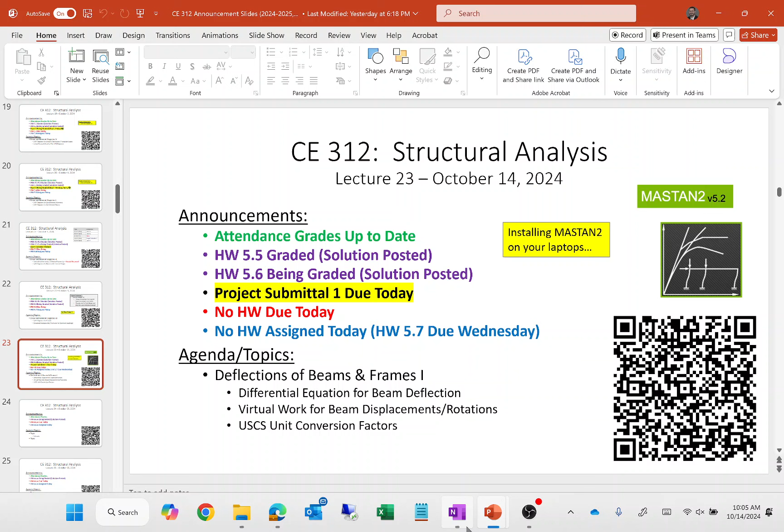He didn't get the code because he walked in a couple minutes late. Listen, he's like, I'm wearing this hat, he won't notice. I'm just messing, I'm just playing.

Okay, so today what we're going to do is talk about deflections. I'm going to tell you today is going to be a little bit like movie time, whereas we're going to be talking through a derivation. I just want you to sit back and absorb what we're going to talk about today. Before I start clicking through the slides, I want to go through a couple of summary bullet points here on the board. Nothing here on the board is going to be in the slides, I just want to use this for discussion purposes.

Let's strike a line in the middle of the board to separate our discussion. Okay, so the first thing I want to talk about is axial deformation. This is basically what we dealt with for trusses, when we did a truss analysis.

Now, if you recall, if I wanted to find the deflection at some point in a truss, at some joint, we would be using the principle of virtual work, right? Let's make sure we're all on the same page. The method of virtual work says that we perform two analyses. We perform a real analysis, so we analyze the structure subjected to the loads as they are present on the original problem. Then we conduct a virtual analysis. Remember how the virtual analysis works? You kick all the original loads off the structure, and then you put a single unit load at the point that you're interested in finding the displacement in the displacement's assumed direction. If you get a positive answer, that means the assumption's correct. If you get a negative answer, the assumption's incorrect. Everybody with me on that?

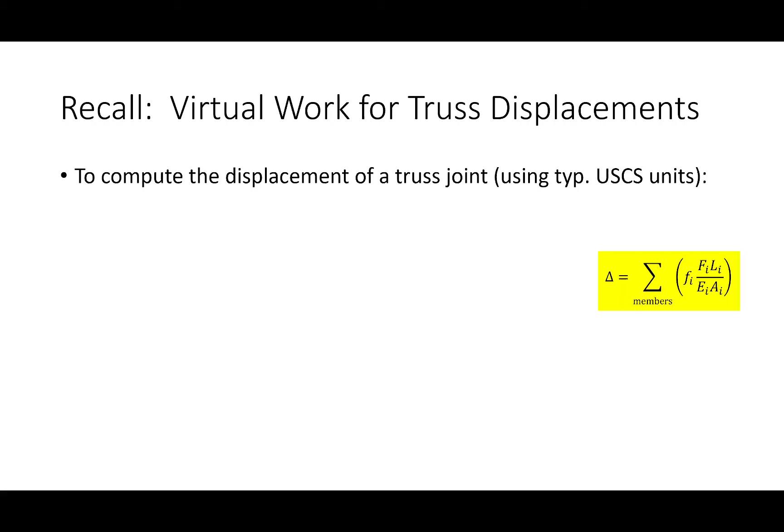Let's take into account what each of these terms are. The big F is the real forces from the real analysis, and little f is the virtual forces from the virtual analysis. Big F is measured in kips, little f is unitless - it doesn't have any units. Now what about the member length? It needs to be expressed in inches, because this is in KSI, square inches. But if I gave you a truss, did I tell you the members were 140 inches long, or did I tell you they were 10 feet, 25 feet, 30 feet? What did you then do to those lengths? You converted them to inches by multiplying by 12.

So I propose we have a conversion factor here of 12 - that if we had left everything in feet, our answer would not have made sense unless we multiplied the answer at the end by 12, because the member lengths would have had to be in inches. Does that make sense? If that's the case, I propose we'll have similar conversion factors for beams and frames, but they'll be a little different. We're going to have a conversion factor for deflections and a conversion factor for rotations. We'll get to this near the end of our lecture today, but I just wanted to have everything here on the board.

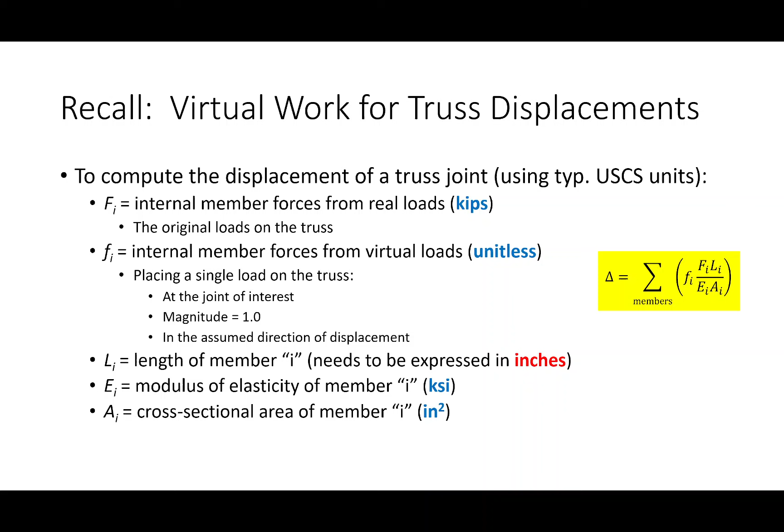Now let's go back to our energy discussion that we had brought up when we first started evaluating trusses. We said, okay, we're going to treat truss problems like an energy problem. Energy going into the system has to equal energy going out. In other words, the stored energy, the energy that the system has to store under applied loads has to equal the deformations that you get under those loads.

Sort of like Link with the bow in Zelda, right? Link applies an external force, the bow deforms. The further that Link draws the bow, the more energy goes into the arrow. Same idea here. When you apply loads to a system, it deforms. The more load you apply, the more deformations that you get. And so it's a linear relationship if you assume linear elastic behavior, which for most routine structural analyses we do.

We also did some math tricks, two math tricks. The first math trick is we said the problem with a direct energy comparison is that if you want to find deflections at some point, you don't have a load there. So we'll put a fake load at that point. We'll call it a virtual load. We call that P1 in our analysis. So we'll preload the structure with this fake load, then put the real loads on it. So that was our first math trick.

And our second math trick was if all the energies have to equal, then each of the components have to equal one another, and we'll just deal with the easiest one. We'll deal with W2 and U2. Set those two terms equal to one another and recognize that P1 is the fake load that we made up. We'll call that load 1.0 or 1. And by golly gosh gee, we get our deflection equals little f big F L over EA, which was what we were after the whole time.

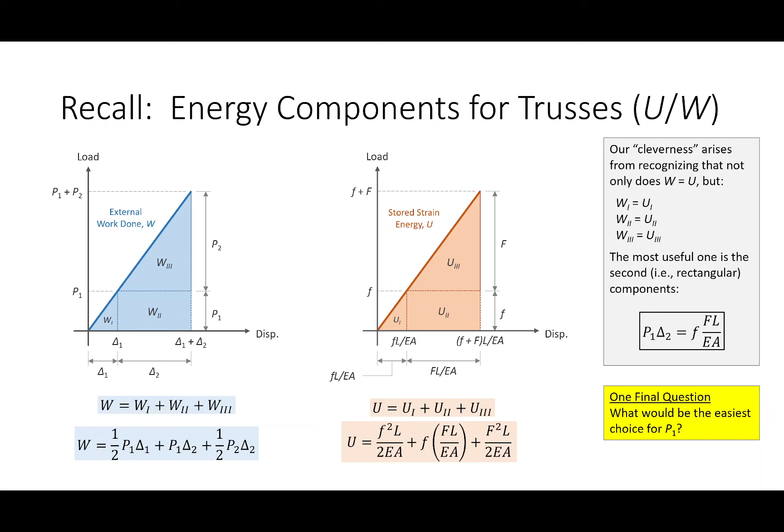Now, just a side note here, and this is what I was talking about with this point right here, is that when we're computing displacements, what we're doing is we're summing up the energy in each member. We're summing up that U2 term in every member. That is the displacements, essentially. So summing up the displacements is the summing of that stored strain energy. That definition, this closed formula right here.

This only works if everything is constant inside that sum. I mean the little f, the big F, the E, the A, all those four terms. The E and the A, that makes sense, that for the most part is going to be constant in most practical applications. But if the loads are variable, then that isn't going to be the case. So what's going to happen if the loads are variable?

So if the loads are variable, what we're going to do is instead of having sigma equals F over A, we're going to have sigma equals some function F over A. And so we will substitute that in. So instead of sigma equals E times epsilon, that's Hooke's law, this is sigma F over A, this is d delta over dx. We will rearrange that, and then we'll integrate that by saying du is going to be the force times the displacement, sum, and we get this.

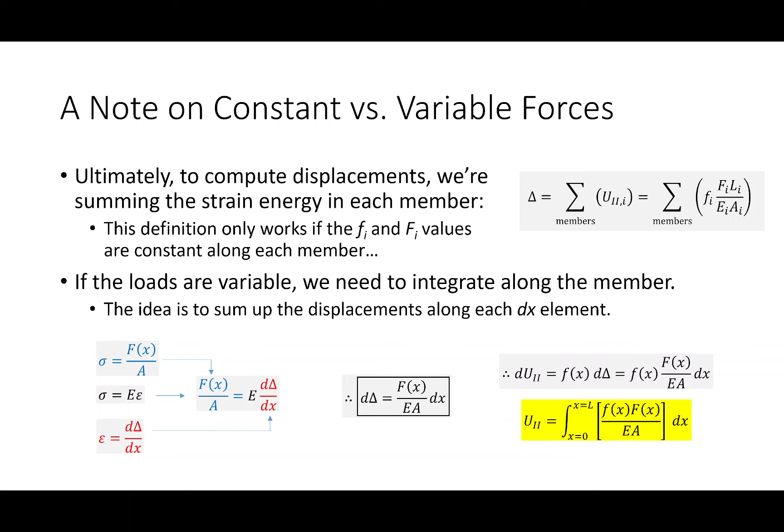Okay, so what we're going to have to do is see if we can come up with this definition. And maybe more specifically, like here we have an area. Why do we have an I value? What's going on there?

So we're going to talk about deflections in beams. And what I'm going to try and get to are sort of two facts, which hopefully you've all seen before at some point. If I were to draw this on the board, is this familiar? I hope it is, from Engineering 216, right?

And the second thing that we're going to draw is y double prime, or the second derivative of displacement, is m over EI, or in some cases negative m over EI, depending upon your sign convention. But we're going to get to this here in a bit.

All right, so let's go through some math preliminaries just to make sure we're all on the same page with math. I don't want some of the math you're going to see in the slides to be all that confusing. So let's just start real basic.

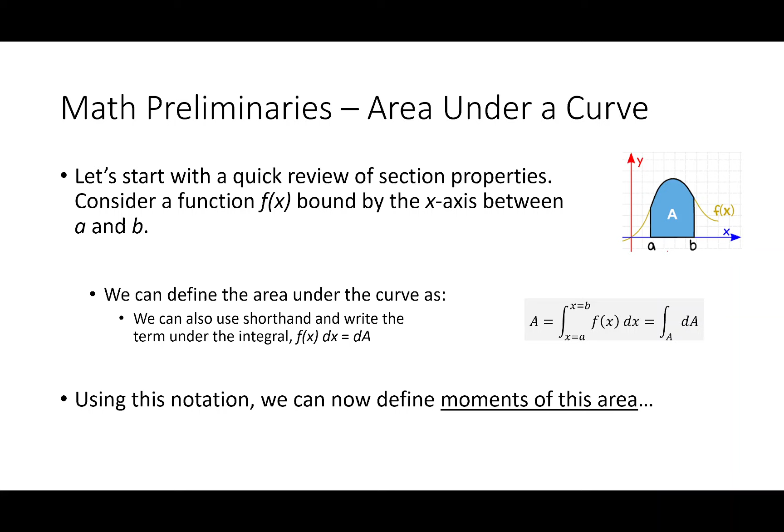Okay, so using this notation, what I'm going to do is define what are called moments of area. So area, I propose, is the integral of just dA. When I say dA, I'm talking about a little tiny sliver of area, and the integral of dA is just summing those little slivers up over a given region. So here's what I mean by the moments of area.

So if the area is just the integral of dA, then the first moment of area would be the integral of x dA, or the integral of y dA. Now notice it looks like I've got a typo because I'm saying qx is the integral of y dA, and it looks like my symbols are flipped, but they are in fact not. That's actually correct, and here's why.

If I have a coordinate system and some random arbitrary region in space, and I pick this point right here, how far away is that point from the x-axis? It is some distance y, right? So if you want to talk about how far away you are from the x-axis, it's some distance y. If you want to talk about how far away you are from the y-axis, it's some distance x. So that's why these are flipped. Does that make sense? So a first moment of area would be the integral of x dA or y dA.

A second moment of area would be the integral of x squared dA or y squared dA. You could have a third moment of area, a fifth, a 47th moment of area, if you just keep integrating x to the third, x to the fifth, x to the 47th, whatever. But in mechanics, for the most part, the first moment of area and the second moment of area are the only ones that have immediate usefulness to us as engineers.

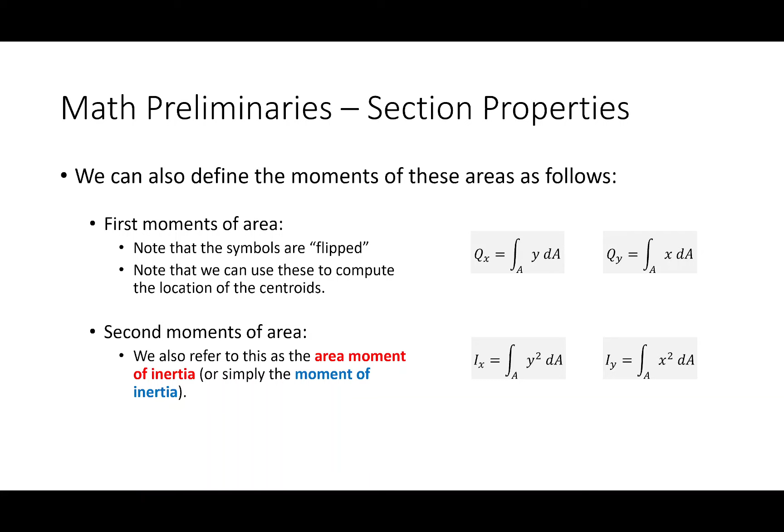The second moment of area is useful because it's what's called the moment of inertia. Hopefully everybody's heard of that term. Mathematically, the moment of inertia is just the integral of either x squared dA or y squared dA over the region in question. The reason I bring it up is because it's going to show up in our derivation.

Now the other math preliminary I want to talk about is the curvature of a function. If I have a given function, how would I evaluate its slope? I evaluate its slope by calculating the first derivative, right? If the first derivative is related to the slope, what's the second derivative related to? Remember the term? It's concavity—concave up or concave down. So the slope is related to the first derivative, and the concavity is related to the second derivative.

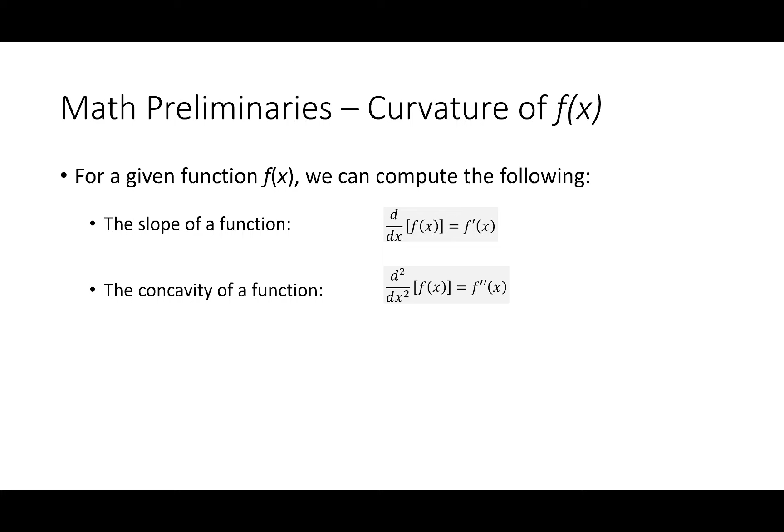What about the curvature? I'd bet that if you took Calc 1, there's a chance you either didn't talk about curvature at all, or if you did, it was just a passing, fleeting thought. I bet nobody even remembers what the curvature formula is. That's the curvature formula. I didn't remember it either when I was reviewing—I'm sure we talked about it, but it was probably just fleeting.

To calculate the curvature of a function, this is how you do it. You take the second derivative divided by all this hullabaloo squared—all this hullabaloo down here raised to the three-halves power.

What I propose is that in this class we're basically going to say that the first derivative is really small, so if you square it, you get a really, really small number. So we're going to approximate this as just that. Because again, we're taking a derivative and squaring it, so we're taking 1 plus a really tiny number. We're going to basically say that's 1, and 1 raised to any power is 1. So that's how we're doing that.

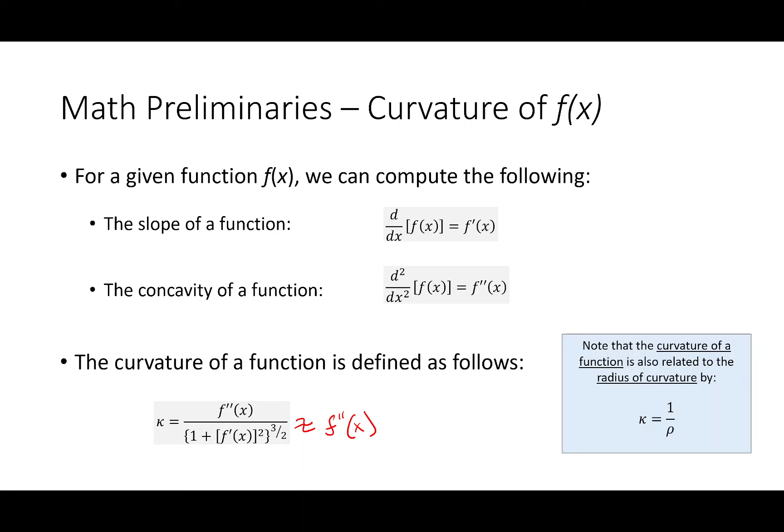Everybody good? All right, so far so good. So, the mechanics for beam deflection—now let's get into beam deflection. The mechanics for beam deflection are a tad different than the mechanics for axial deformation, and I'm going to try and illustrate what these mean. We do have some background that's kind of identical.

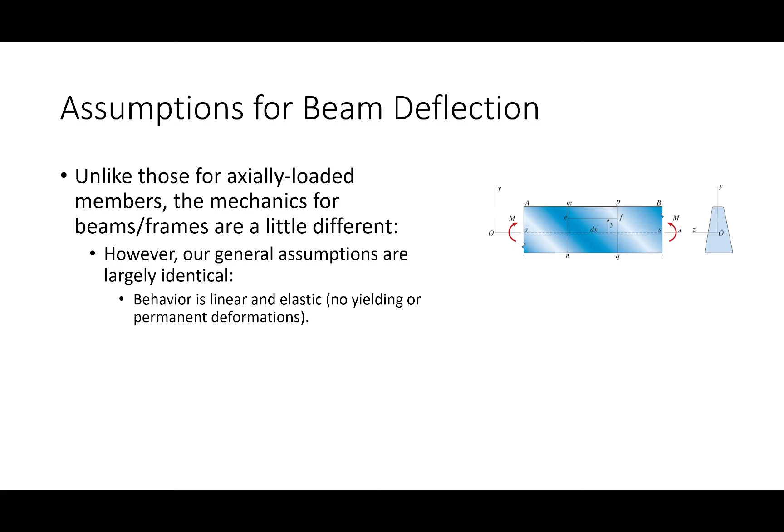For example, we are going to assume that behavior is linear, and we are going to assume the behavior is elastic. That part isn't really going to be a problem—we don't have any permanent deformations, anything like that.

One thing we are going to have to deal with, though, is this idea: we're going to say that deflections are small when compared to the original member lengths. That's really just a fancy way of saying that when I load a structure, it deforms, and I do not need to go recheck equilibrium to make sure the reactions haven't changed or the moment diagram hasn't changed once the structure is deformed. Technically, it's a different structure before and after deformation, but I'm proposing the deformations are small enough that it doesn't substantively affect our analysis.

And so what we are doing is what's called a first order analysis. That is not to say that we don't have second order analyses that we have to conduct in engineering.

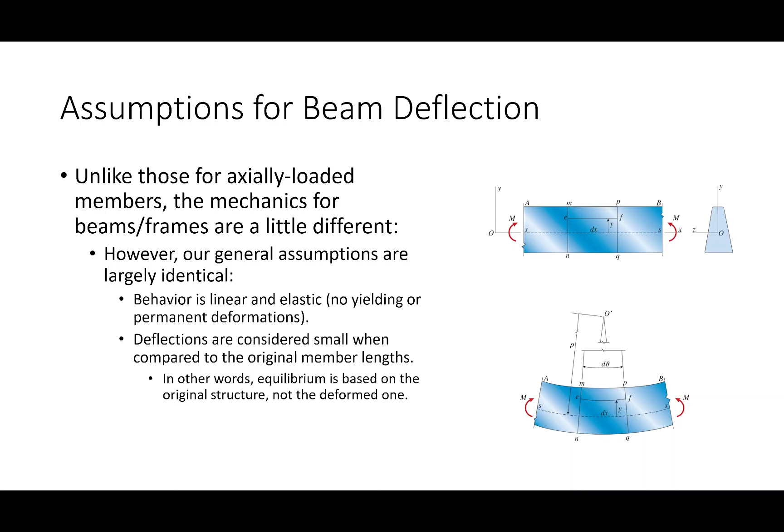We do. Often they are related to stability related problems with structures buckling and whatnot. And so they tend to get relegated to more specific design applications, like there's ways of doing second order analysis in steel design and concrete and so on and so forth. So if you take steel, we'll talk all about that.

Okay. Now if you deform a beam, what we propose is that the neutral axis of that beam remains unstretched. So if you take a beam and deform it, like if you take your notebook and bend it, we propose that the center of the beam remains the same length. So for example, if the beam looks like this, we say above the neutral axis, the beam gets shorter. Below the neutral axis, we say the beam gets longer. So the bottom of the beam stretches, the top of the beam smushes together.

So let's see if we can apply some algebra to figure that out. Let's go back to some basic geometry. We're treating this like a circular segment. So if rho is the radius and theta is the angle, we can say that the initial length, this unstretched length right here, is just rho times theta. Y'all remember that? Like if you have a circular sector or segment, the length is just the radius times the angle, right? And that's the initial length.

The final length, or the stretched length, would be the same thing. It would be the radius times the angle, but the radius is different. It's not the radius, it's the radius minus however far up we're going. Does that make sense? So the initial length is rho times theta. The final length is rho minus y times theta, that quantity.

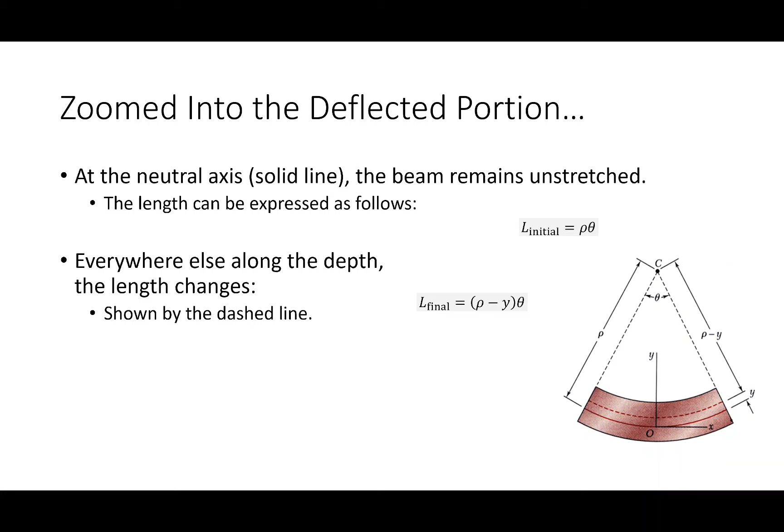So maybe what I'll do then is I'll say, okay, if I want to define strain, I'll say the change in length over the original length, which in this case is going to be L final minus L initial over L initial. So if you're wondering where I got this term, it's just change in length over the original length. And after doing the algebra and working it out, a lot of stuff cancels, like my rhos or my thetas cancel. I end up having some rhos cancel, and I end up with negative y over rho. Okay? So far so good? Okay. All right, so that's strain.

So if I wanted, I could take strain times E and get stress. So far so good? So what I'm proposing is I have one equation for stress. So one equation for stress is negative EY over rho. And then the next thing I'm going to do is I'm going to see if I can get another equation for stress, and see if I can set those two equal to one another. Okay? Has everybody got all this?

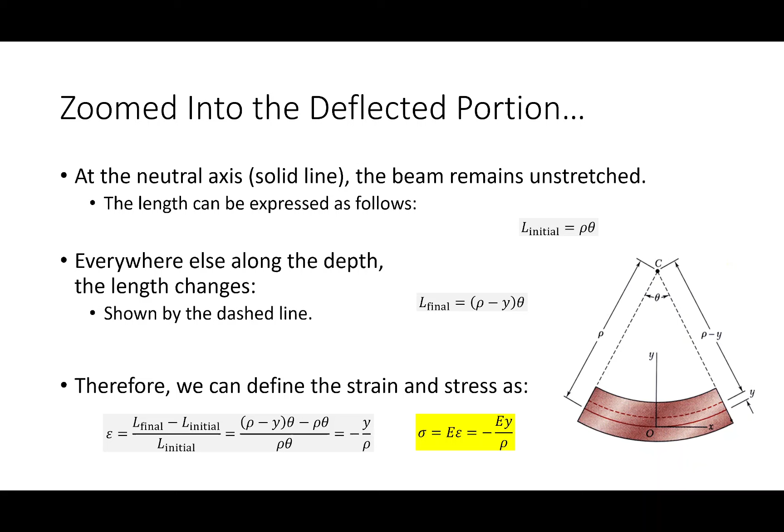Let me stick here for a second. Now this is good if y'all ready. I'm not going to get in your way. Everybody good? Okay, so now let's see if we can look at this another way.

Let's see if we can look at this from an equilibrium standpoint. So this first derivation was sort of like, okay, let's take a look at the structure deformed and get back to the stresses. Whereas this derivation, I'm going to look at the forces in the equilibrium and go that way and see if I can make them match.

So like I said, I propose that the center of the beam doesn't deform. Well, if the center of the beam doesn't deform, then I propose the center of the beam doesn't have any stress. And I propose that stress linearly varies from the centroid. At the centroid, we have no stress. As we get below the centroid, the beam stretches, so I have tensile stress. As we get above the centroid, the beam squishes, so I have compressive stress.

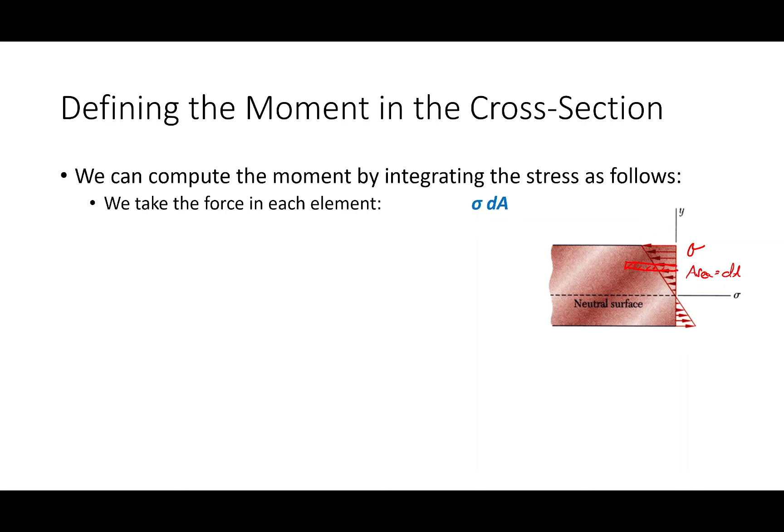Right? So how would I start attacking equilibrium? Well, maybe what I'll do is I'll take a little tiny element at some random point, doesn't really matter. Let's take a little element right here, and let's say it's got some stress, and the area is some little sliver dA. So I'll say that the force in that element is sigma dA. Now the moment arm from the neutral axis is some distance y.

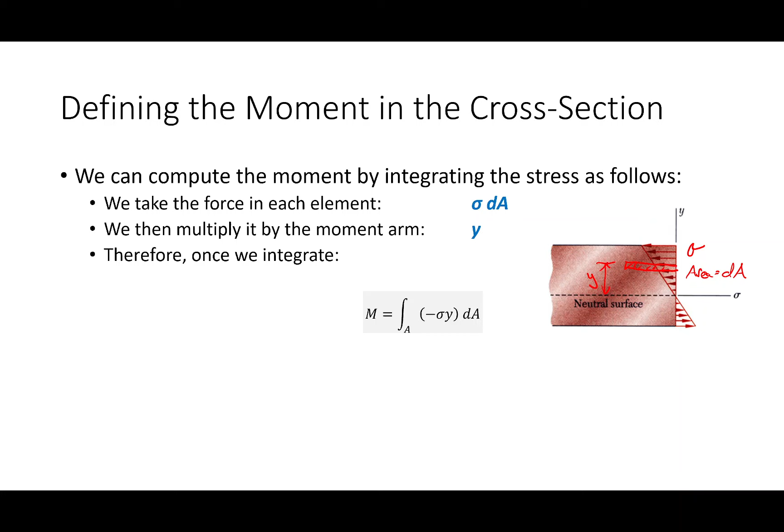So if I take sigma dA, multiply it by y, and integrate all that, that'll give me the moment. I'm throwing a negative sign in here from our sign convention, like smiley face positive. Our stresses are opposite sign convention. Like up here, this is a positive distance, but that's a compressive stress, so it's negative. That's why the negative comes from. So now what I've got is m equals the integral of negative sigma y dA. What's sigma? Sigma's that. So I'll take that sigma, plug it into here, and I get that.

Anything look familiar in this equation? What is the integral of y squared dA? That's the moment of inertia, right? So I'm going to take this and replace it with just the moment of inertia. And so I get m equals EI over rho, and rho in this case is the radius of curvature. So we're getting to this real quickly.

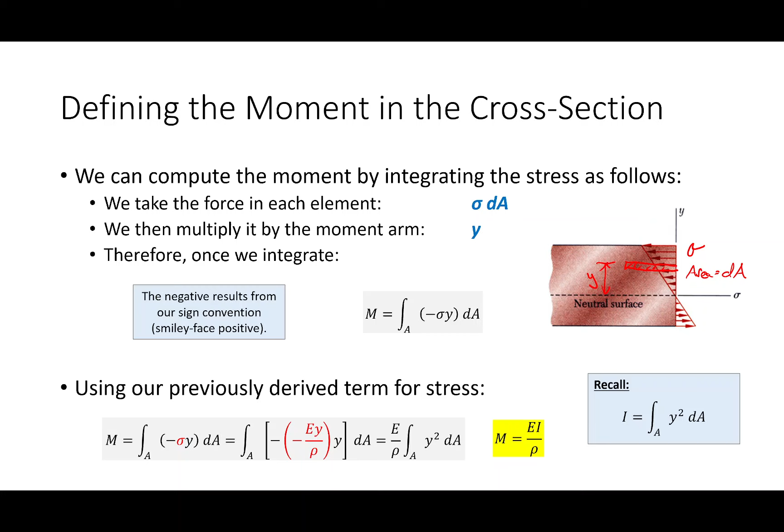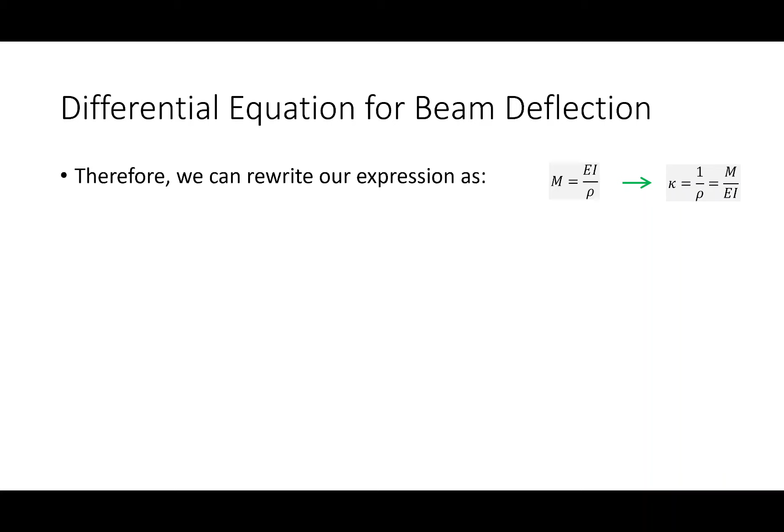So I've got that our moment is EI over rho. I can rewrite that as curvature, because if rho is the radius of curvature, 1 over that is the curvature, m over EI. And we said that we were going to approximate curvature as the second derivative. So we get to this: the second derivative of deflection is m over EI.

This is one of the most fundamental equations in all of mechanics. Now how do you get to this? Well, if we were in Engineering 216, basically all we would do is say, here's our stress profile, that distance is y, and the slope of that line is just m over I. That's how we would get to that. But in here, we don't really care so much about this equation as we do about this one. This is one of the most fundamental equations in all of mechanics. That is, if you ever hear the term moment curvature, this is what we're talking about. If you ever hear the term Bernoulli beam bending equation, this is what we're talking about.

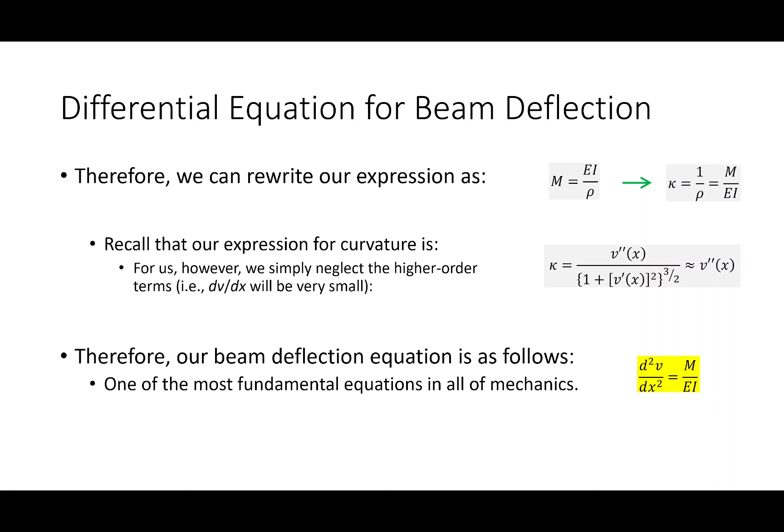I said Bernoulli, and you said, this is not fluids, you're not allowed to mention that word in here. So this is a safe space. This is a safe space. This is a laminar space. I need to stop talking. I need to stop talking about fluids, right? I'm sensing some turbulence in the crowd. No, the jokes are really flowing. That was good, that was really good. All right, I'm done. I love my job.

Okay, so now I want to see if I can use this equation to get to our method of virtual work. Can we apply the method of virtual work for deflections and beams and frames? Absolutely. So let me show you how it works.

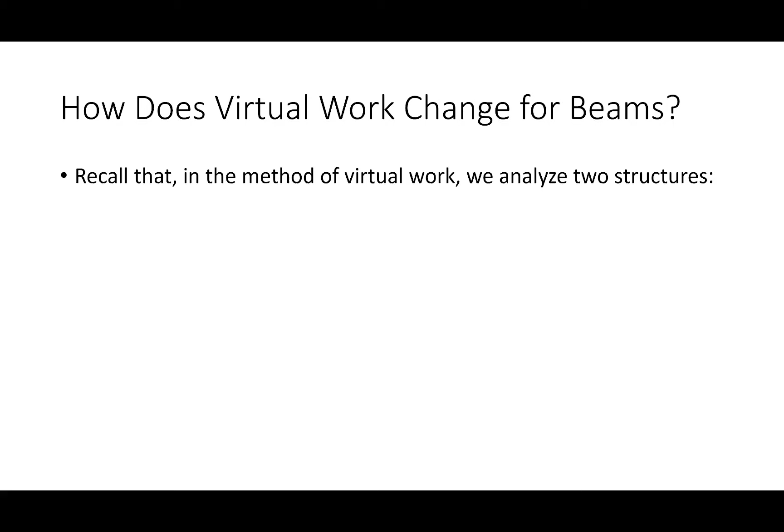So how does virtual work change for beams? First off, in the method of virtual work, remember that we analyze two structures: the original structure with all the loads present, and the virtual structure with a single unit load at the point of interest. That is still the same for beams and frames, nothing changes. But what does change is maybe our definitions for what these W and U terms are, because the mechanics are different.

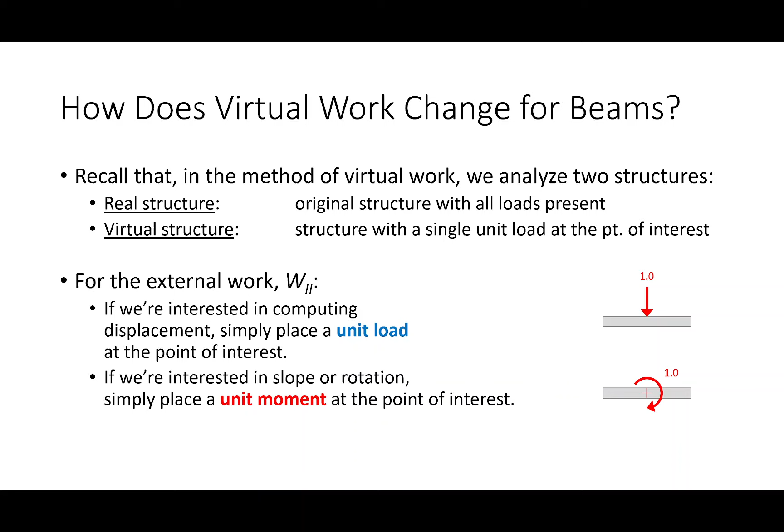One thing I'll point out is that when we start doing virtual work for beams and frames, not only will we be interested in how much a point deforms, but we'll also be interested in how much a point rotates. So there's a difference between a translation and a rotation, or a deflection and a slope. So if we're interested in how much a beam deforms, we'll put a unit load; if we're interested in how much it rotates, we'll put a unit moment. Here's a beam, and let's put some loads on it. When the beam deforms, it's going to deform maybe something like that, that's what it's going to look like when it deforms.

So maybe we'll be interested in the displacement, but we'll also be interested in that angle change. So we're going to get both. We didn't really get that with trusses. With trusses, it was just really a displacement at the joints. With beams and frames, we could get both. So we might be interested in how much this rotates or how much this deforms.

And so we just handle it with a unit force or a unit moment, okay? And just like with truss deflections, we assume a direction. If it's positive, our assumption's correct. Otherwise, we just flip the direction of our answer.

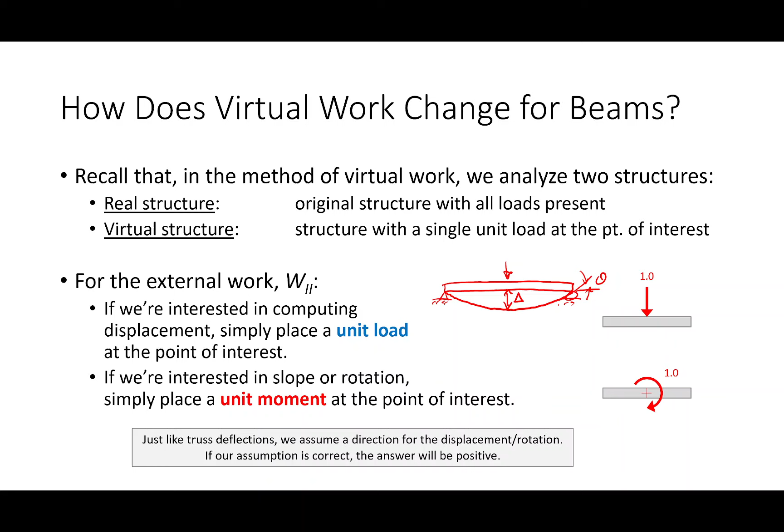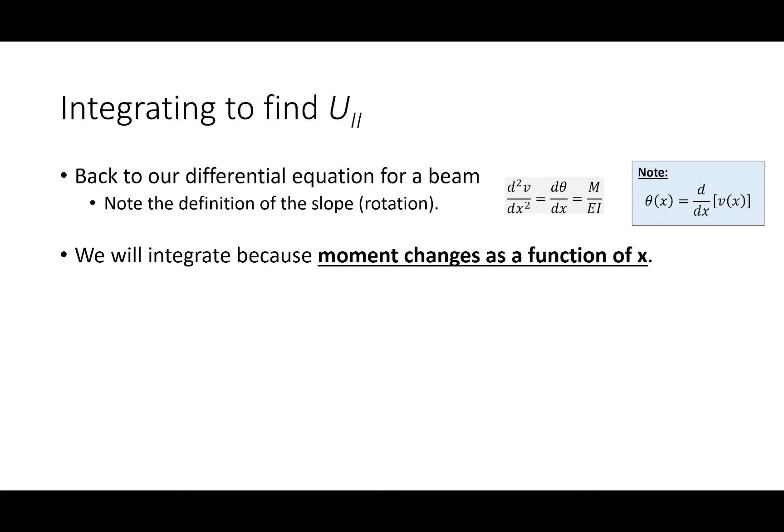So what we're going to do is we're going to use this to find U2. So we're going to integrate. We take our second derivative of displacement, which is m over EI. If the second derivative of displacement is m over EI, then the first derivative of slope is m over EI. So I'm just saying slope is the derivative of the displacement, okay? And so we have to integrate because moment changes as a function of x. This is really the big reason why we can't use this, but we have to leave things in integral form, okay?

We're going to handle this the same way that we handled the derivation for truss members. If the force changed, we're going to handle it the same way. So what we're going to have is a little change in angle is m over EI dx, and we're going to leave that as a function. Our internal energy is just a little virtual force times a rotation, not a displacement in this case, a rotation. So leave that in functional form over EI dx, and then just integrate.

Set the two equal to one another, and again, we can let that virtual load be whatever we want, so we let it equal 1, and then we get this. So again, the big difference between a truss analysis and a beam analysis or a frame analysis in terms of deflections is that we have to leave these in function form because moment diagrams go up and down and up and down and up and down, okay?

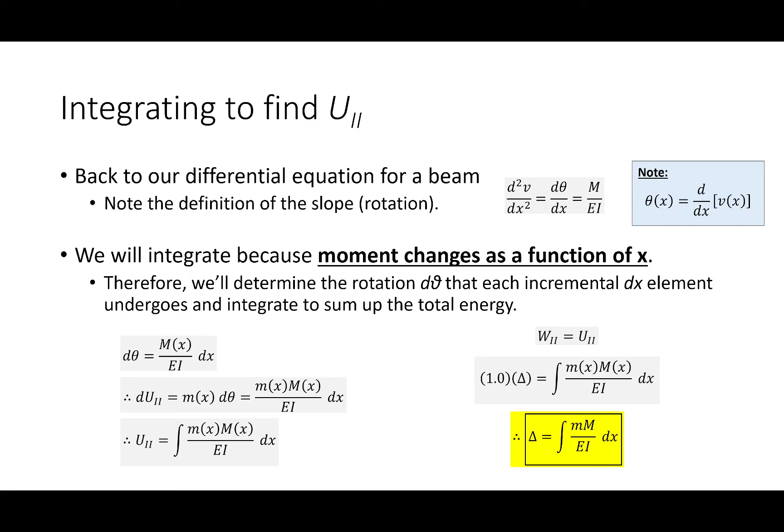All right, so here's virtual work for beam deflections. So this works regardless of whether or not you're trying to find a translation or a rotation. It doesn't matter, same process. We take our moment functions and integrate them. So we're going to have two sets of moment functions. Don't worry, we're going to have a lot of problems on investigating how to do this. We're going to have moment functions from real loads, and we're going to have moment functions from virtual loads.

So instead of a little f and a big F, we're going to have a little m and a big M. Instead of them being numbers, they're going to be equations. So like little m might be x plus 3, and big M might be x squared minus 4, right? And so we're going to integrate them. But when I say integrate them, our Casios can do a lot of the work for us. So if you have a calculator that can do integration, you probably won't have to actually do any Calc 1 in here. But don't worry, we'll have some practice on this.

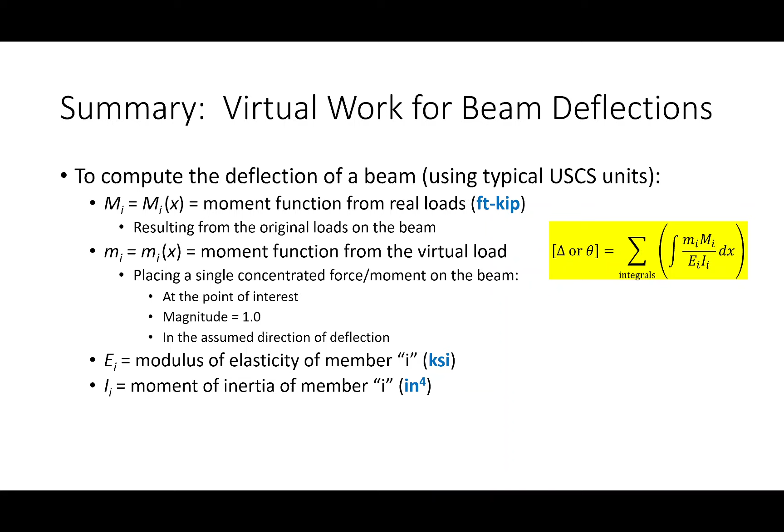We'll have our E value in KSI. We'll have our moment of inertia in inches to the fourth, okay? And as we're gonna see, the actual integration itself is actually gonna be pretty easy. The hard part is actually what's in this box right here. This is the part right here that's gonna drive you all up the wall, is that if you have multiple moment functions, you're gonna have to perform multiple integrals, okay? In fact, all the example problems that we're gonna do together are gonna be just about this. That's gonna be the problem, okay? So don't worry, that's really sort of the main thing that we're gonna be investigating.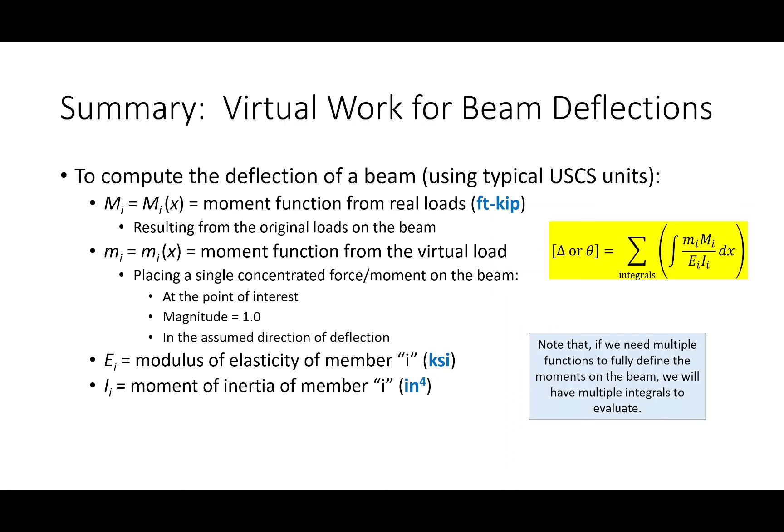Okay, one thing left to discuss before we call it today are dimensional considerations. And let me go back one just to sort of make the point. We do have a dimensional mismatch in what I have here on this slide, because I've got moments in foot-kips, but I've got this in KSI, and this is inches to the fourth, right? So there's something wrong in the dimensions, and I gotta sort that out, okay?

So I wanna talk about these dimensional considerations, but I kinda wanna talk about them generally. So I just wanna make a point about something, okay? Bear with me, this is just, you know, almost like a thought experiment, okay? So if I integrate x squared dx, right? What is the integral of x squared dx?

X cubed over 3, plus C. Thank you. You're 100% right, okay.

Let me ask this question a little more generally. What would the integral of this be? Now let me ask what I'm really asking: what is the highest order x term in this equation? X squared, right, it's a 2. When I evaluate the integral, I get a higher order term, going up to order 3, right? Whenever I integrate, I go up in order. Everybody with me on that?

Okay, so before we get to this, let's just take a step back. My second derivative of deflection is M over EI. From a units perspective, that would be foot-kips divided by EI.

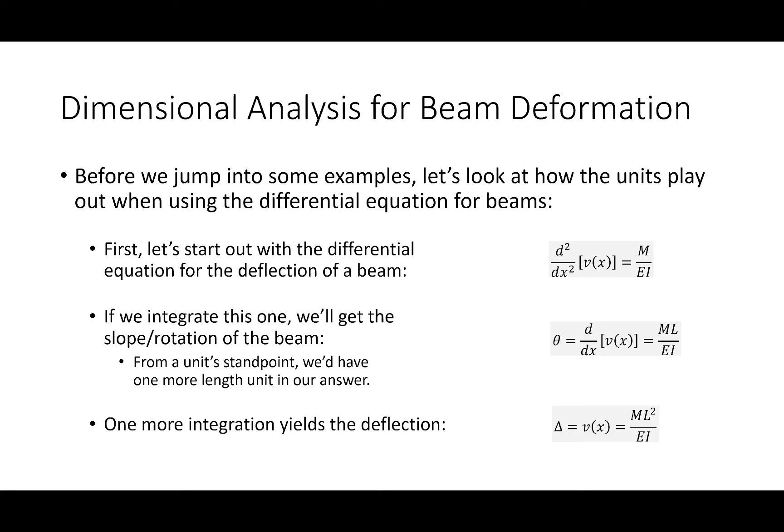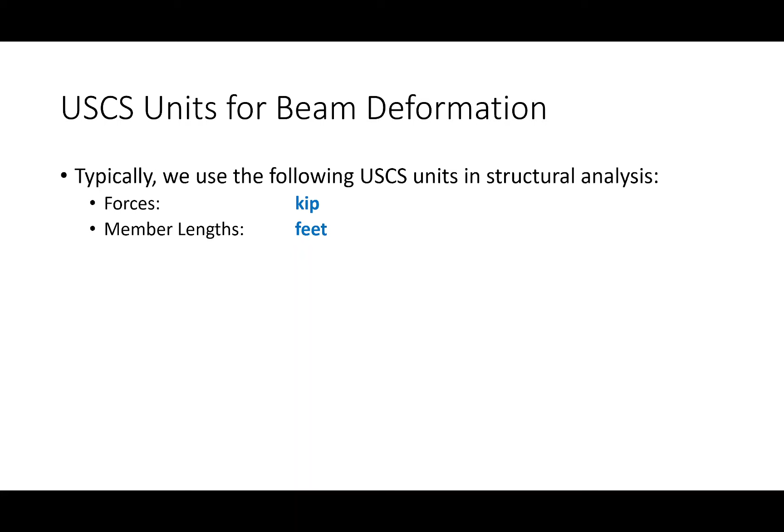So let's start plugging in units and seeing what happens. Forces tend to be in kips, length tends to be in feet, so distributed loads would be in kips per foot, moments would be in foot-kips, E would be in KSI, moments of inertia would be in inches to the fourth. So if I plug this in, I get foot-kips times foot, kips per inches squared, inches to the fourth. Doing all the algebra, I get foot squared over inches squared.

This is what rotation gives me. And if I do the same thing for deflections, I'm going to get foot cubed over inches squared, okay? So I've got foot squared over inches squared, and foot cubed over inches squared. How do I correct that? What I need to do is figure out what I want the answer to be.

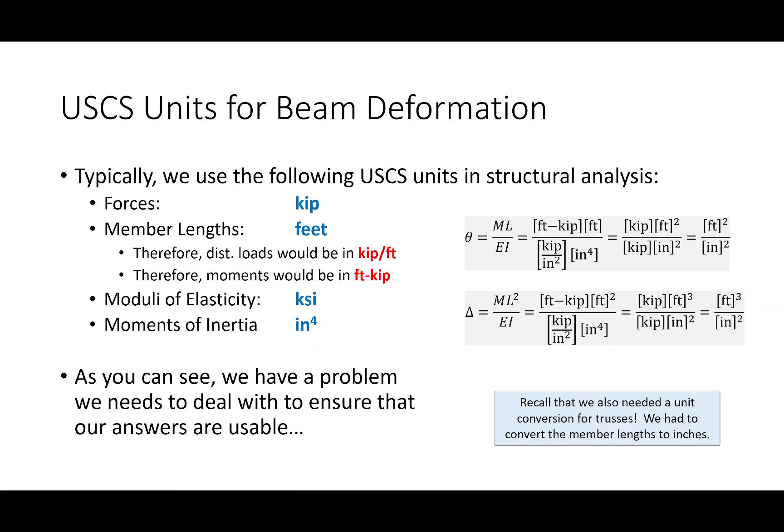Here we needed a conversion factor of 12. Why am I coming up with 1728 and 144? Well, I'm coming up with those because I'm going off of my desired units. I want slopes and rotations to be in degrees, and I want my displacements and deflections to be in inches.

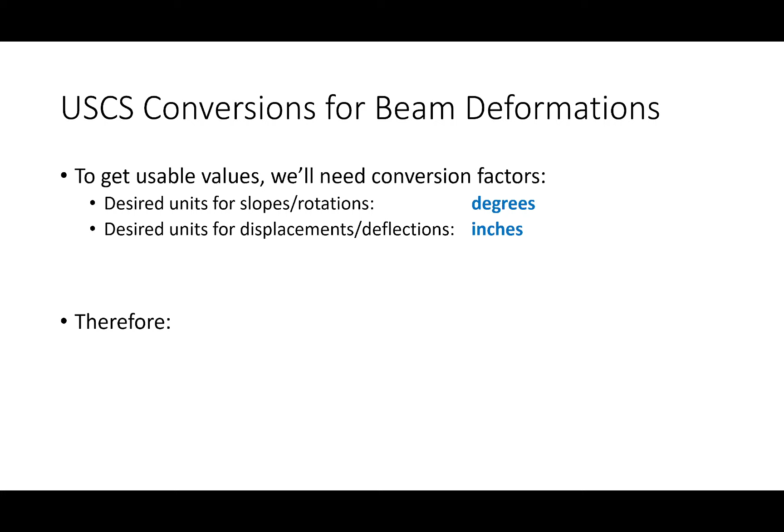So for rotations, I've got foot squared over inches squared. I'm going to convert this foot using 12 inches per foot, but then do it again because it's foot squared: 12 inches per foot, 12 inches per foot. If all I did was that, the answer would be in radians. If I want degrees, I do 180 over pi. So what do I get for a conversion factor for rotations? I get 144 times 180 over pi.

What about displacements? With displacements, I've got foot cubed, so I convert using 12 inches per foot, 12 inches per foot, 12 inches per foot. 12 times 12 is 144, 144 times 12 is 1728. This is just 12 cubed, and this is 12 squared. I'm adding 180 over pi to get it into degrees. Okay, that's why that is.

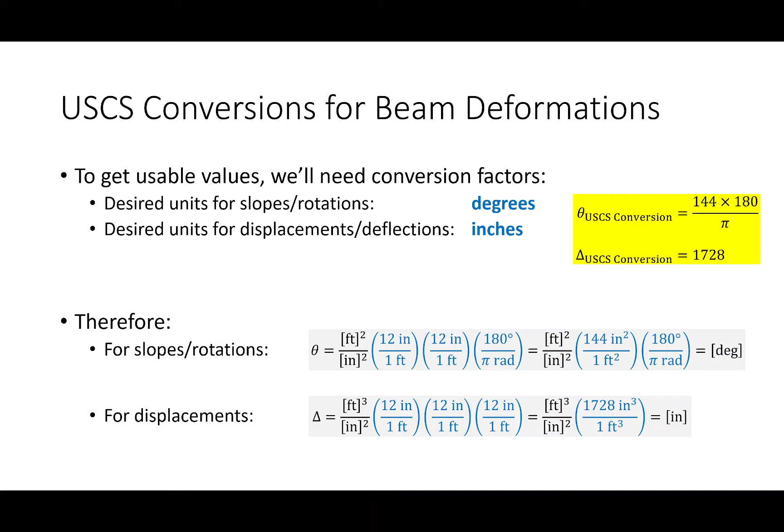So today was all about throwing a bunch of info at you. Wednesday and Friday we're going to start using this info, so these are going to be the unit conversions we use starting Wednesday. This is one of the reasons I didn't give you any homework today. I knew I was going to throw a lot at you, so I wanted to just let it sink in.